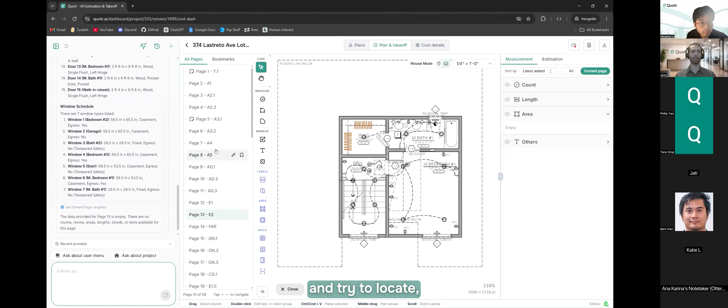It can start helping you with things like this. It'll actually go through the whole plan and try to locate all the doors and windows because it's categorized. It takes a little bit of time every time you create a project to do that categorization, and then you can ask it questions about the document. These are very useful things you can look through to get number breakdowns of how many items are in the drawing set and stuff like that.

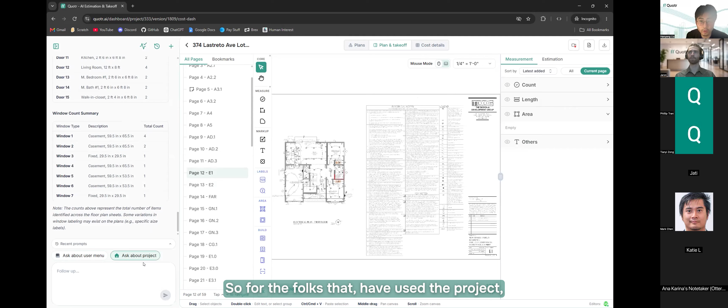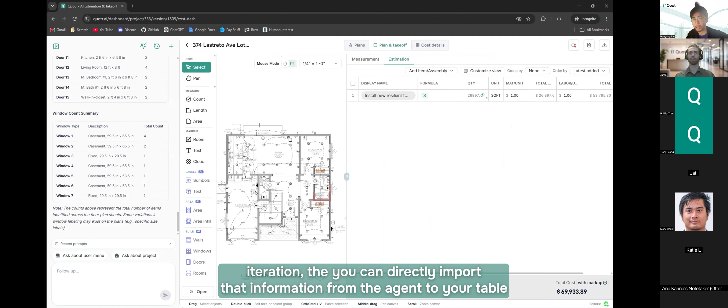Is there anything else you want to add on this, Hanya? Yeah, so for folks that have used the Quotr platform before, they know on the right side we also have the cost estimation table. So anything the AI agent does, for the next iteration you can directly import that information from the agent to your table and then spit out the end proposal. Basically that's the workflow.

You can take these values and put them into your actual table to get the cost estimate. But to get started, it's already able to capture anything in the drawing sets where you have understanding about the quantity takeoffs part.

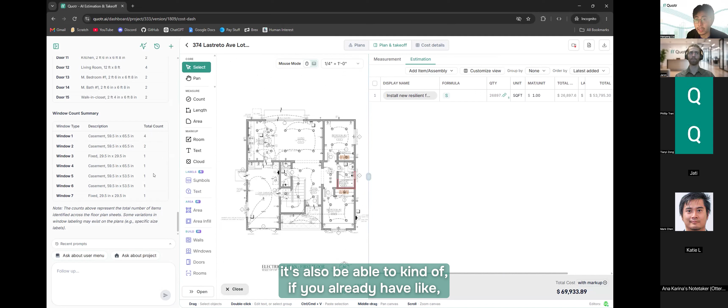It's also able to, if you already have items, like templates you've input into the table, it can actually read your table and match that with the template you already assigned to that specific item.

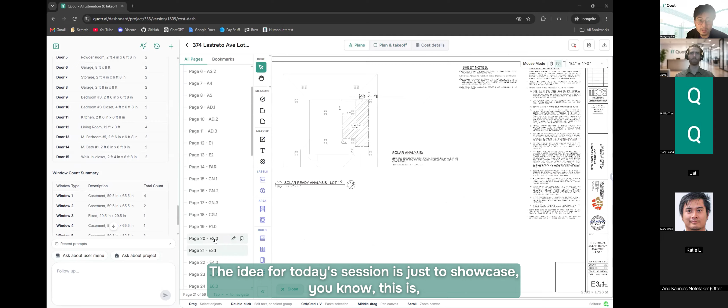Other than that, it's very straightforward. The idea for today's session is just to showcase that this will understand the drawings better than you do in the first place. And it will help you get to the level where you can do any understanding of the specific project for light fixtures, for walls, for windows, for all the subtrades.

Recently, we've done a lot of drywall calculations, as well as for stonework, where a lot of subcontractors are directly pulling that information.

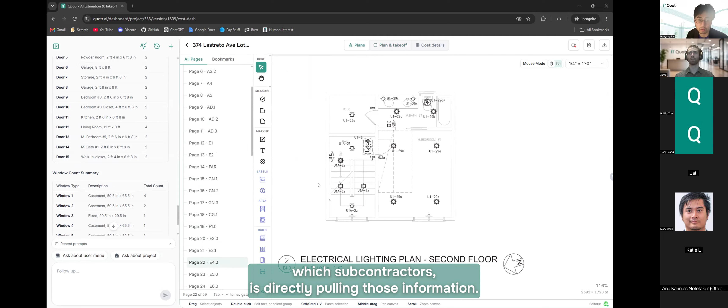A big benefit of the agent is consider this project has 59 pages, but this can work up to like 200 more pages and stuff. This can work with a very large PDF file that may be hard to sort through, and the agent will probably be faster at telling you where things are on the PDF than you could do yourself.

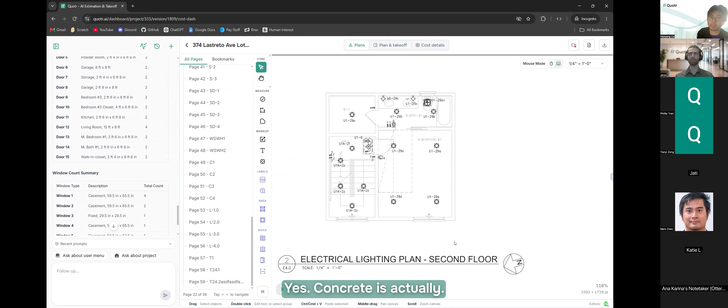I see Karina is asking another question about concrete. Yes, concrete is actually, so if you're asking about what kind of concrete you're going to be using, what specific location areas, you can also ask that to the agent.

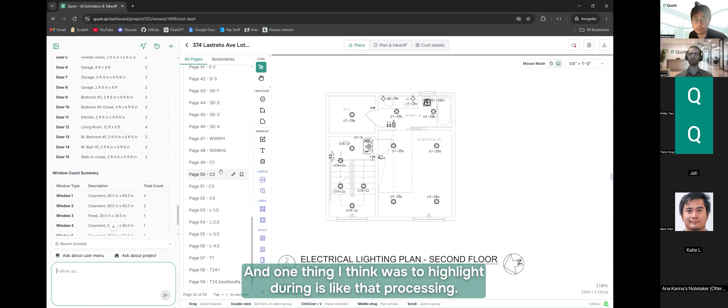One thing we wanted to highlight, Jaron, is the processing. Maybe we can start it from scratch to open up a new one, and then we can tell them when this is ready to use. It does take like 30 seconds to about 2 minutes to process the drawings, depending on how big it is. Let me just open up this one.

Basically you can just upload the drawing sets into the system, and then the drawing is being processed. Later on, it can actually spit out the results for you.

So all you need to start is just your PDF. The entire editor and stuff is based off of that, and the PDF names and all that stuff will be generated after you upload your PDF.

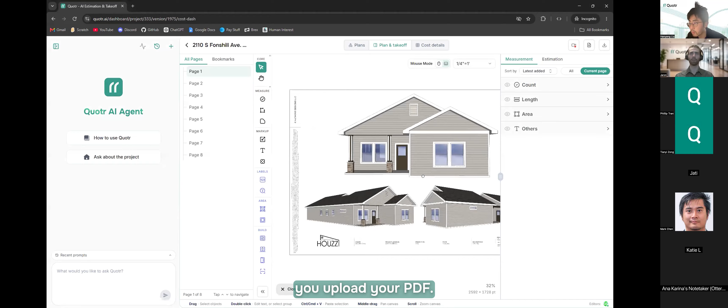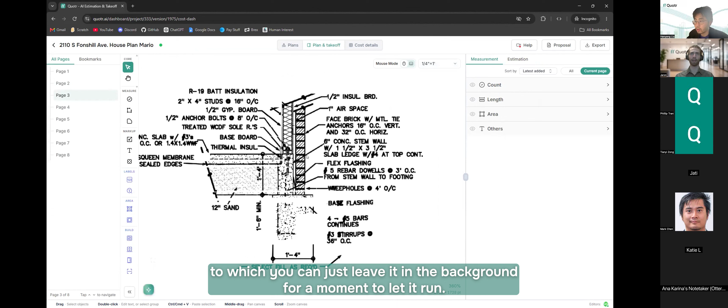So yeah, you can see that it's still initializing. It takes a little bit, like 30 seconds to a minute for this size of PDF. In the meantime, you can go through and add stuff manually too, but you can just leave it in the background for a moment to let it run.

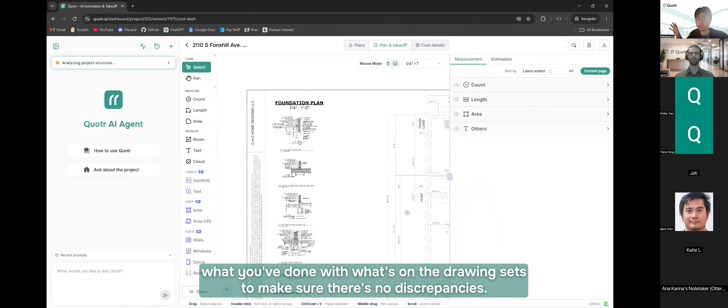Another thing where the agent is going to be helpful is when you finish and have a table of estimates, estimation line items in the project. Jaron, do you have a specific project that has a lot of the line items? Because it can actually cross-check what you've done with what's on the drawing sets to make sure there is no discrepancy. If we can demonstrate that, it would be very helpful.

Let me see if there's a good one. By the way, we do actually have a service branch for our software where we directly help customers if they don't have enough bandwidth to do these jobs, where our in-house cost estimator is using these agents to deliver. They typically use this quite a lot, but currently not on my accounts, so I don't really have pre-made projects.

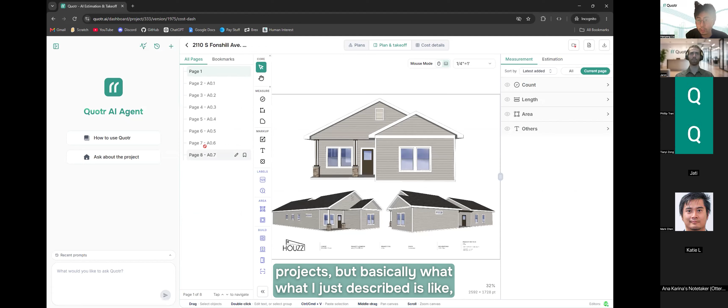But basically what I just described is like if you have already used the AI tools listed here to detect the symbols, like the ceiling fans, maybe you can demonstrate one of the symbol detection tools. Yeah, sure.

Notice now that the agent's already completed, so you can ask it questions already. It only takes like a minute to do. Let's try some symbol detection.

Maybe we're looking for this symbol right here. You can just select it on the drawing and then select your entire search area. The idea is trying to compare this with what the AI agent actually finds out. So let's first find all these things for you and then assign it to specific line items. Obviously if you have the item, you can add your own custom items into the database, and use those exact ones.

Now it has this item, and now if you see, the quantity is actually linked fully to this item here. What sort of prompting does this go for?

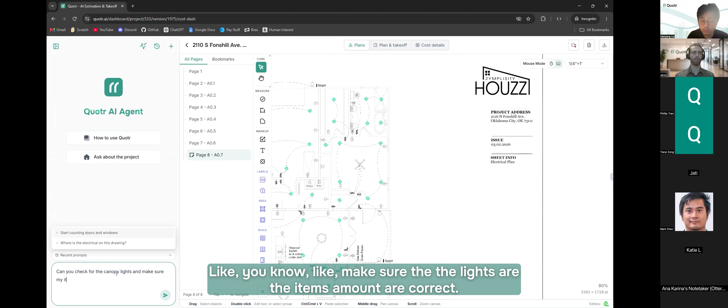So should I compare? Basically, we can say: can you check for the canopy lights and make sure the stuff I wrote is correct, like make sure the lights and the items amount are correct. Notice the agent's also going to prompt you when you select the trades, proposing some of the most common asked questions, so you can also get those in there.

See, it's actually going to pick up on this because we're not using the canopy—this is not really the canopy light, so it's picking it up. On the drawing it says there's only 25 because there's actually a different thing that's a canopy light, but this one is a 40-item set. We just picked a random item when we did it, so the agent already recognizes that we picked the wrong item, pretty much. There's a discrepancy there. So if you did something like that, it could help check and make sure your final process is correct.

So this adds an extra layer to make sure all your bids and everything is correct. Awesome. Because it's so simple to use, it doesn't require a long time to really explain how it works.

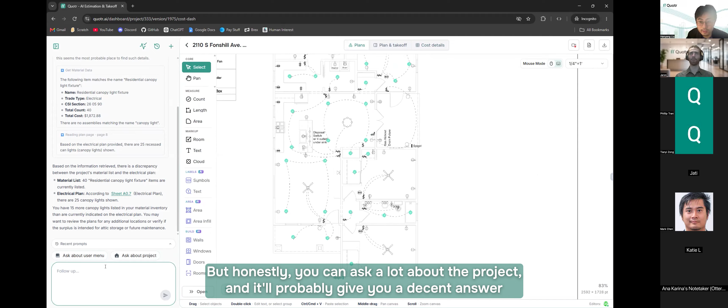Honestly, what I would say is you can ask the agent itself how it works too. You can ask it, what can I ask you, and it'll be able to tell you what you're kind of looking for. You can ask a lot about the project and it'll probably give you a decent answer of what you're looking for—it can kind of count stuff. In the future, we'll have that part where it'll be able to do even more, where it can actually do things for you, like markups and takeoffs.

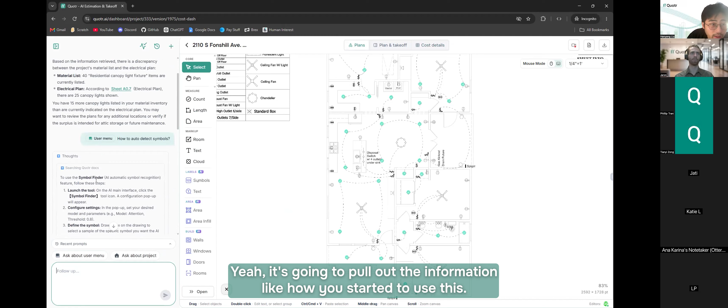So another thing is this actually has two parts, where the first part is just about the user menu. This has ways to teach you how to use the entire Quotr system outside of just the AI agent. But it can also directly refer back to the specific project, pulling out information step by step so you can start to use it. If you don't know how to use the symbol detection or something, you can just ask, and it'll read through our documentation and instruction files to give you the answer. That's all with the agent.

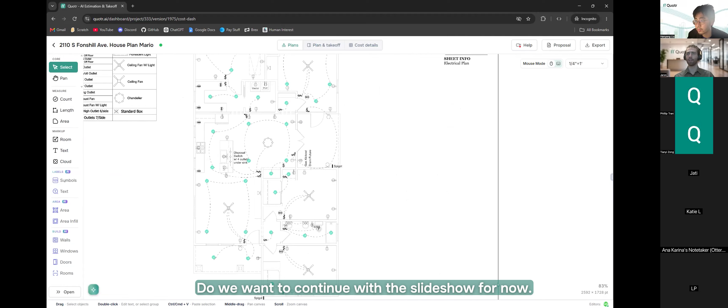Do we want to continue with the slideshow for now? Of course. Also, the long run agent is done too, so we can go back to that if you want. Let me just finish this out first, then we'll do that.

So basically, what this AI agent is really for: as I said, it will help estimators significantly improve their time to do takeoffs and estimation. On the GC side, it's a way to quickly understand the scope for all the trades and help them understand the bidding process. For a subcontractor it's similar to an estimator, but rather than all the trades, they can focus on their own trades on those specific pages and let the work be done by the AI agents.